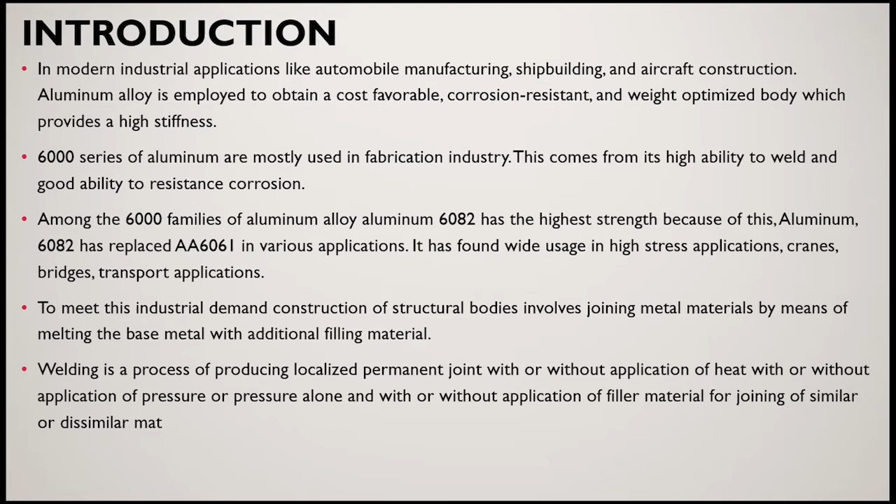So to meet this demand, welding can be done. The welding of aluminum is different from the welding of steel and other metals because there is a formation of an oxide layer in aluminum alloy, and there is also a tendency of hot cracking. So we need to take care of the process parameters to form sound welded joints.

Generally welding can be done by various processes like gas tungsten arc welding, gas metal arc welding, resistance welding, laser beam welding and electron beam welding. But in our study, we have used GTAW welding because various researchers suggest that the joint formed by GTAW welding has good strength and it is a relatively less expensive process.

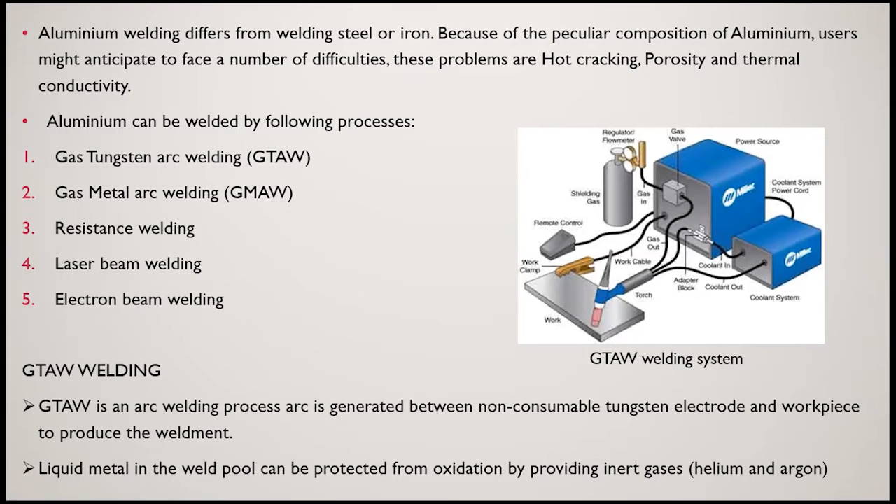So I have gone through various research papers. I will discuss them briefly. Adamovski studied that aluminum alloy has replaced steels in various applications.

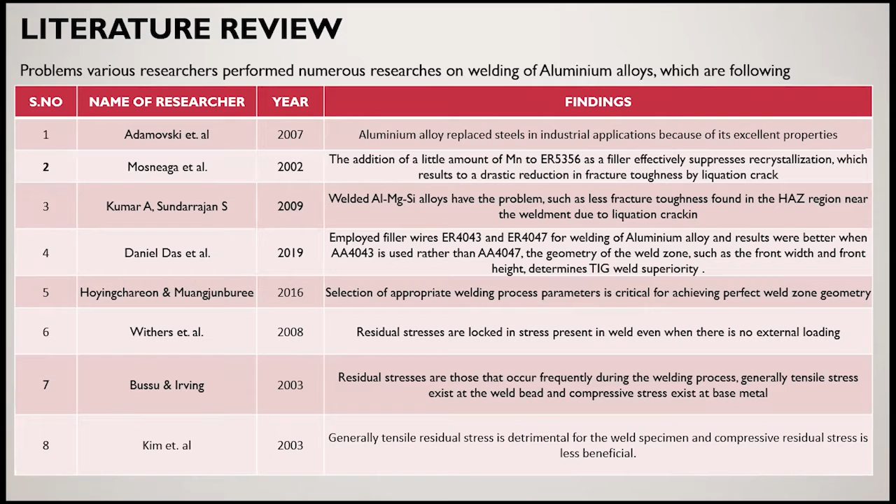Mosneaga studied that addition of manganese to 5356 results in an effective reduction in recrystallization, so that we can get a good welded joint. Daniel Das et al. employed two different filler wires, 4043 and 4047, and found better properties with ER4043.

On the basis of these literature reviews, we have found research gaps. Although GTAW is a very popular process for aluminum welding, there is still a significant challenge to weld aluminum defect-free.

Considerable work has been done on other grades like 6061 and 6063, but very limited work has been done on aluminum alloy 6082 because it is relatively a new aluminum alloy. Also, ideas to improve wettability using other filler materials are missing.

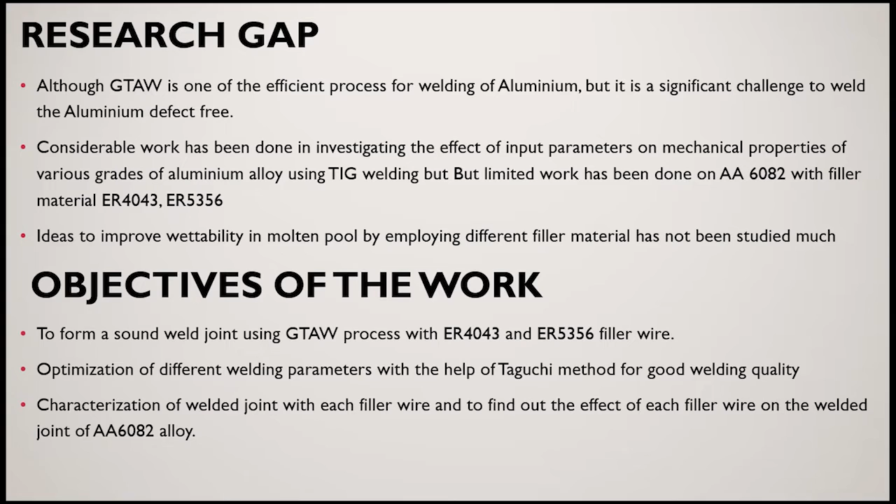So why have we chosen this? Basically, what I'm trying to do is weld the aluminum alloy with different filler materials, because aluminum can't be welded without filler materials due to the tendency of hot cracking in aluminum alloy. So the objective of this work is to optimize the different welding parameters with the help of the Taguchi method, and characterization of the welding joint has been done.

This is our experimental methodology regarding selection of materials. We have chosen the base material as 6082 aluminum alloy. It is basically a silicon and magnesium rich aluminum alloy with the highest strength, and it is used in applications like trusses, bridges, cranes, barrels, etc.

We have used two different filler materials. ER4043 is basically a silicon-rich filler material. Due to the high content of silicon, there is a sudden increase in wettability of the liquid metal in the weld bead, so that we are able to get a good joint.

Next is ER5356, which is basically a magnesium-rich aluminum alloy, and it provides high shear strength in the welded joint. We have selected an aluminum alloy sheet of 3 mm thickness and cut it down into 120 by 70 mm dimensions with the help of a shearing machine.

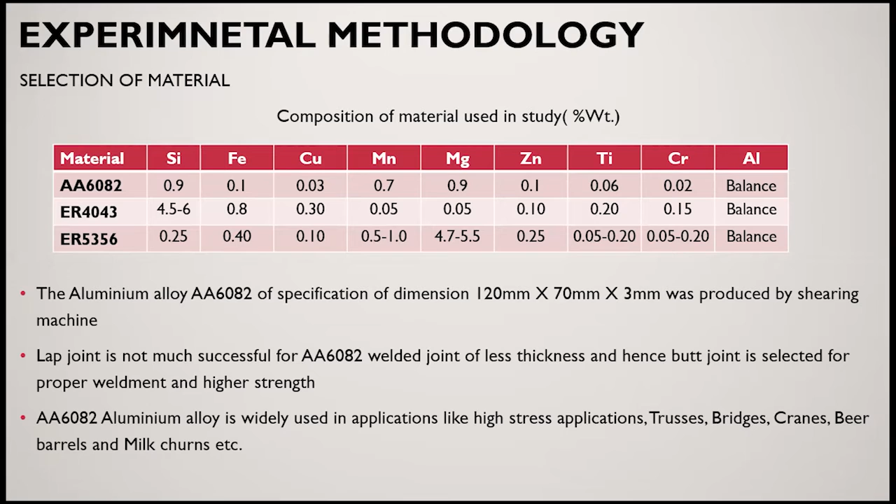So next is selection of process parameters and optimization. On the basis of research papers, we have selected three process parameters: current, welding rod diameter, and gas flow rate.

The operating range of these parameters was selected on the basis of the appearance of the weld bead and the depth of penetration. Various experiments have been carried out by varying one process parameter and keeping the other process parameters constant.

To optimize the process parameters, Taguchi L4 orthogonal array has been used with 3 factors and 2 levels, as shown here. We used the Taguchi method because it helps reduce the number of experiments and provides a predictive model to optimize the solution.

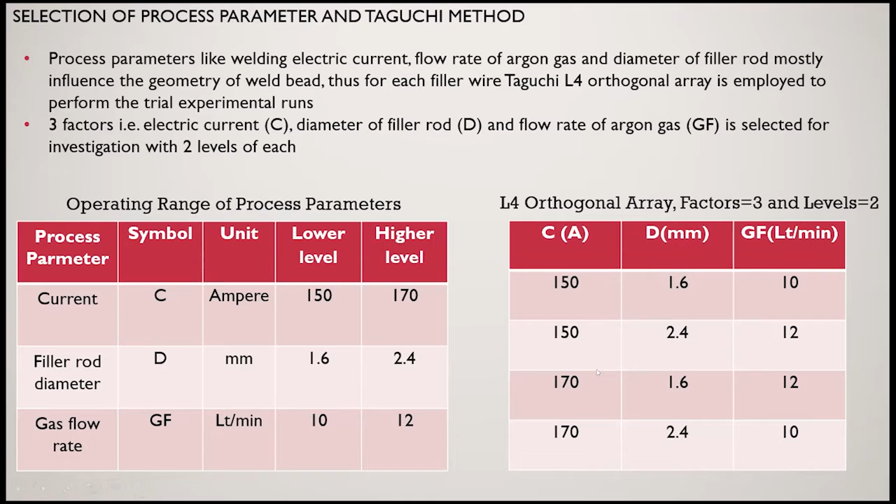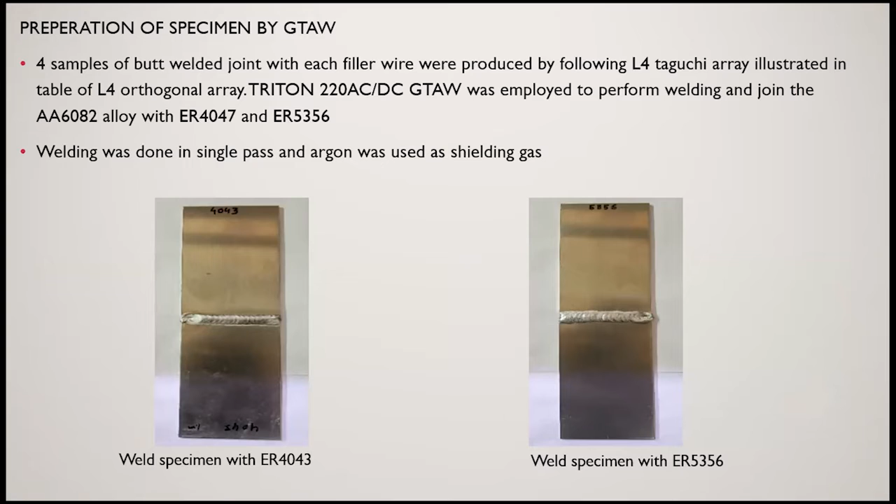These are our 4 levels in this table. On the basis of this table, we have prepared welded joints. We can see here these are our welded joints: this is the weld specimen with ER4043 filler wire, and this is the weld specimen with ER5356 filler wire. GTAW welding was used, argon was used as shielding gas, and welding was done in a single pass.

Next is characterization of the welded joint. We performed a tensile test because it helps us understand the nature of the weld specimen under tensile loading. For this, the ASTM E8M standard has been followed, and laser cutting technique is used to cut the specimens.

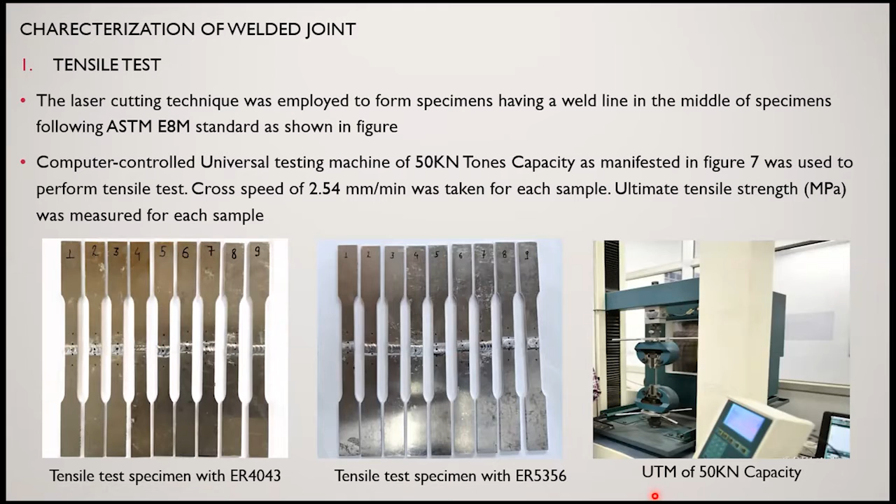These are the tensile test specimens of the weld specimen with ER4043 filler wire, and this is the tensile test specimen with ER5356. This is the universal testing machine of 50 kilonewton capacity present in DTU, used for tensile testing.

Next analysis is micro hardness analysis. Micro hardness test analysis has been done on the optimized sample via Vickers hardness testing machine, with a weight of 500 grams, and indentation time kept at 10 seconds.

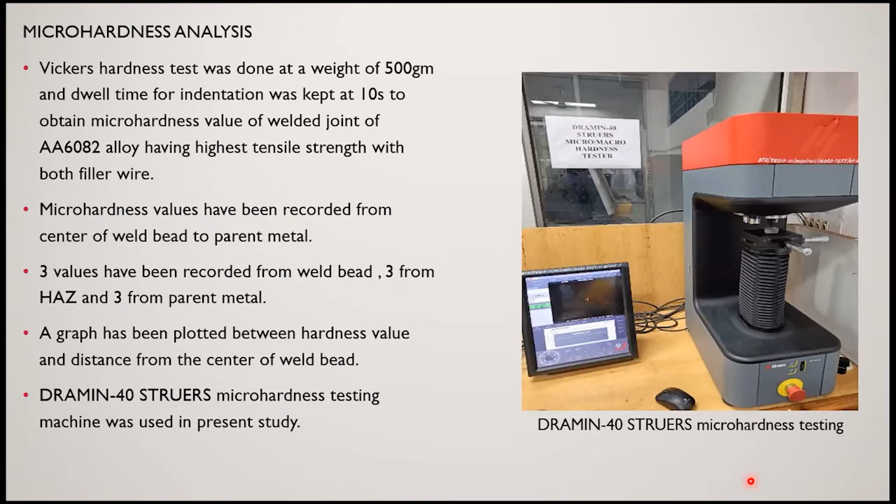Basically 3 values are recorded from each zone: 3 values from the heat affected zone, 3 values from the weld bead, and 3 values from the parent metal. The graph has been plotted between hardness value and distance from the center. This is the DRAMIN-40 Struers micro hardness testing machine.

Next analysis is residual stress analysis. First I would like to tell something about residual stresses. Basically, these are the stresses present in the specimen when there is no external loading.

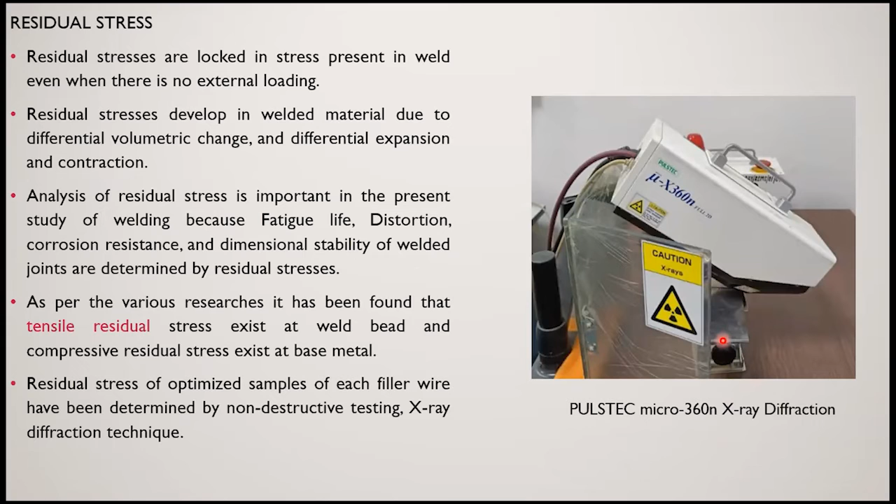Why is there importance in analysis of residual stress? Because residual stresses govern the fatigue life, distortion, corrosion resistance, and dimensional stability of the welded specimen. That is why we performed the residual stress analysis. Non-destructive X-ray diffraction technique is used to analyze the residual stress of the optimized weld sample. This is the Pulstec micro 360 X-ray diffraction machine used for the testing.

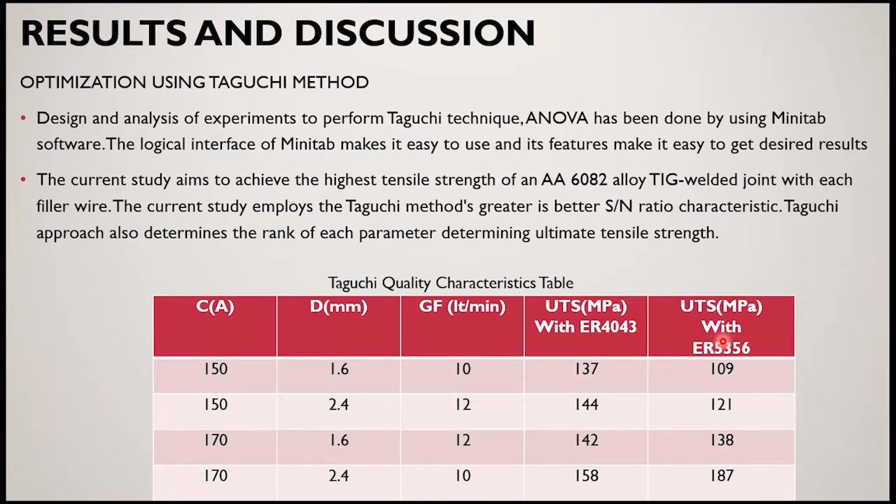Next is results and discussion. We used Minitab software for design of experiments to perform the Taguchi analysis, and we chose the larger SN ratio characteristic.

We chose the larger SN ratio characteristic because we want to maximize the ultimate tensile strength. So we plotted this SN ratio curve with the help of Minitab software, and we are getting the optimized process parameters for the maximum tensile strength with ER4043.

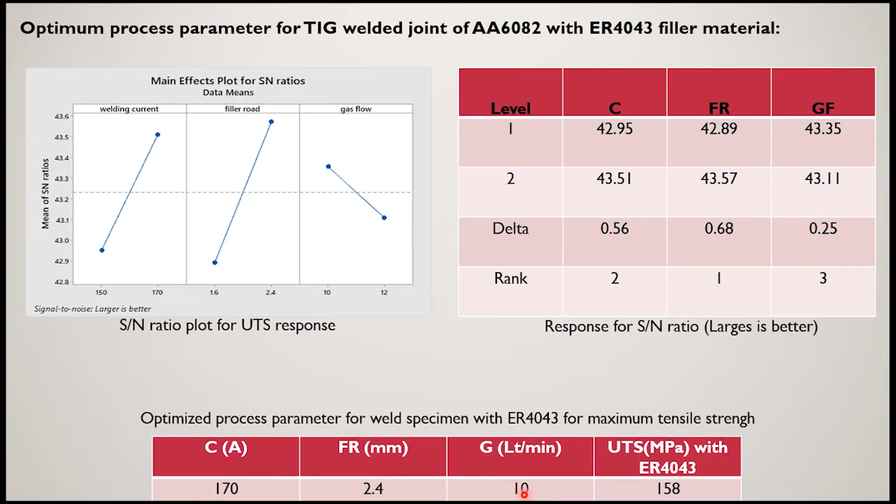Here we can see that for maximum tensile strength of the weld specimen with ER4043, we are getting the level of current at 170 ampere, level of filler rod at 2.4 mm, and level of gas flow rate at 10 liters per minute. We are getting maximum ultimate tensile strength for the weld specimen with filler wire 4043 as 158 megapascal.

This is the optimization of process parameters for the weld specimen with filler wire 5356. Here we have performed the same analysis, and we are getting the optimized process parameters at current 170 ampere, filler rod at 2.4 mm, and gas flow rate at 10 liters per minute.

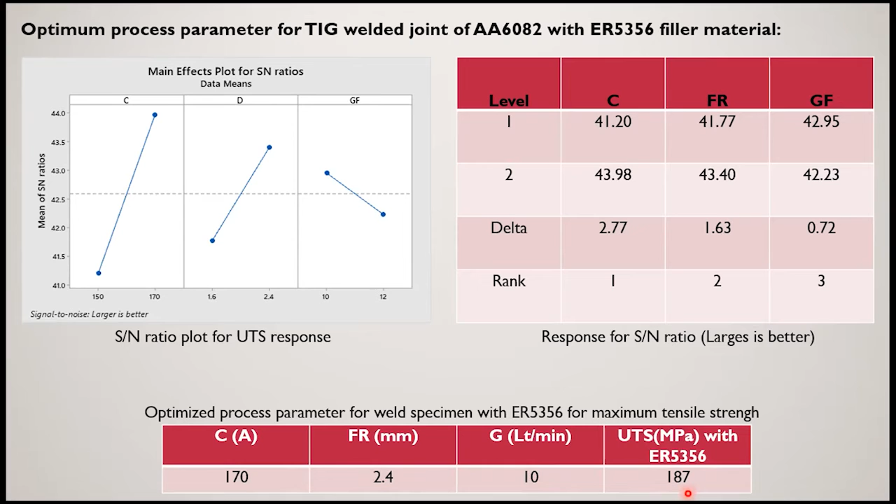We are getting tensile strength of 187 megapascal with ER5356, which is more in comparison to filler wire 4043... I mean, we are getting tensile strength of 187 megapascal with ER5356 and 158 megapascal with ER4043.

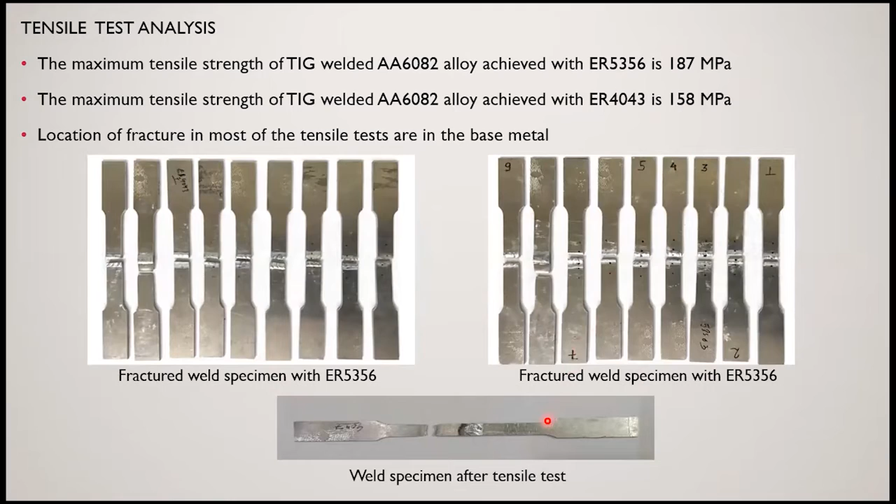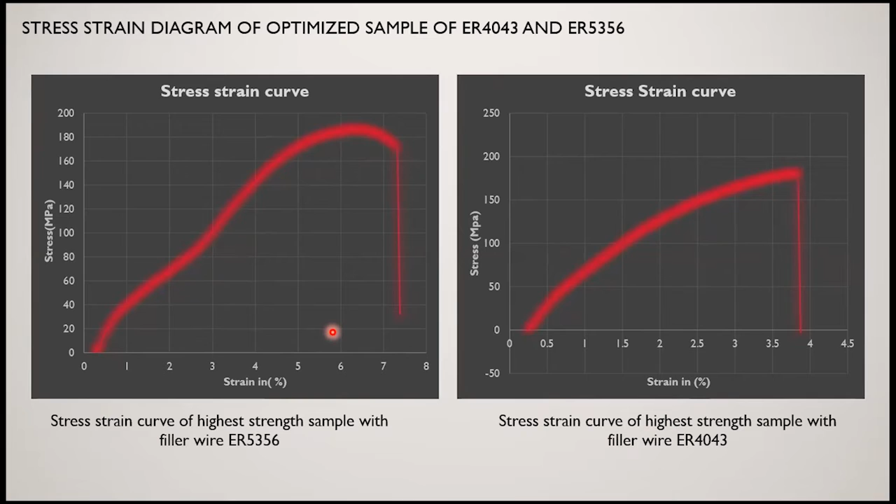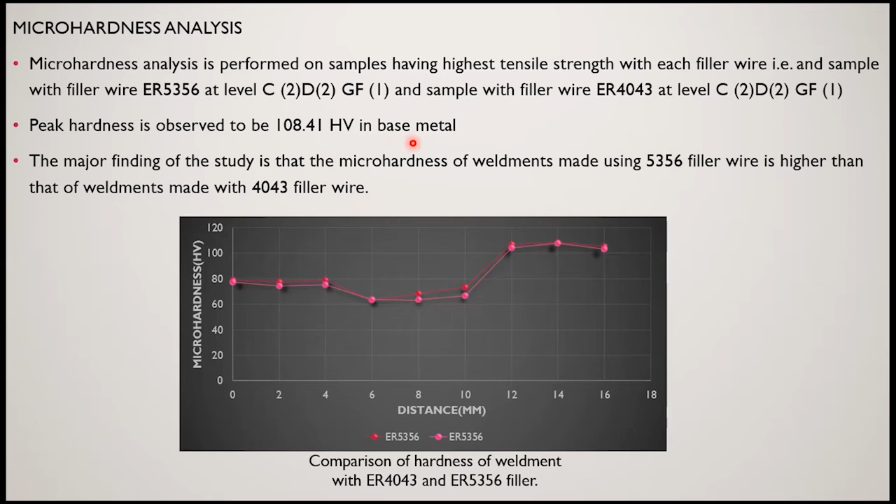Next analysis is residual stress analysis. We have performed the residual stress analysis on the optimized weld specimen of both filler wires. As we can see in the table, this is the weld specimen with filler wire 5356, and these are the levels at which the optimized value comes out. We have performed the residual stress analysis on the weld bead and at the parent metal.

As per various researchers, the tensile nature of residual stress exists at weld bead, and compressive nature of residual stress exists at parent metal. Here plus indicates tensile residual stress and minus indicates compressive residual stress. Our results also match with the suggestions of researchers, that we are getting tensile nature of residual stresses at the weld bead and compressive nature of residual stresses at the parent metal.

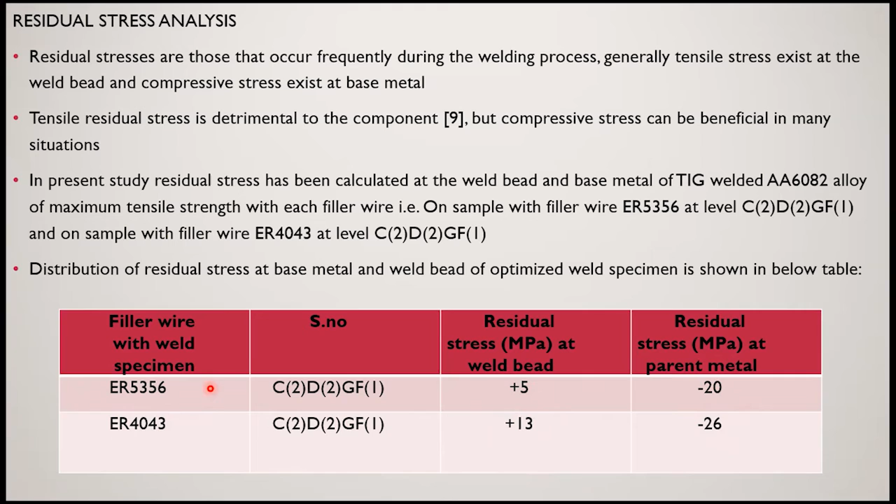We also conclude one thing from the table, that we are getting less value of residual stress when we have used the ER5356. That might be the reason that ER5356 has more strength than the weld specimen with filler wire ER4043.

Now comes to the conclusion part. We have successfully optimized the process parameters of weld specimen with filler wire 4043 and 5356 with the help of Taguchi method. For the optimum level of process parameters for maximum tensile strength for AA6082, it comes out to be 170 ampere of current, 2.4 mm diameter of filler rod, and 10 liter per minute of gas flow rate.

This can be explained that when we increase the value of current, there is a deep penetration of oxide layer, and the liquid metal can go up to the root of the weld specimen and go to every corner, so that we are getting good strength.

Next thing is that tensile strength of weld specimen with 5356 is 187 megapascal, which is more than the weld specimen with filler wire ER4043, which is having strength of 158 megapascal. We are also getting high hardness value with filler wire 5356.

Next thing is that tensile residual stress exists at weld bead and compressive residual stress at parent metal, which is also suggested by various researchers. Next thing is that residual stress in welded joint 5356 has low value in comparison to the welded joint of 4043. So from the above conclusion and analysis, we suggest that...

The weld joint formed with the help of 5356 filler wire yields better properties than the weld joint which has been welded by filler wire 4043.